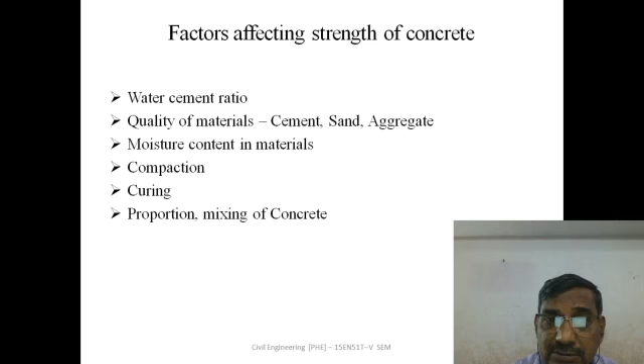Next, the proportion of the concrete, mixing procedure of the concrete and efficiency of the workmanship count for the strength of the concrete. The grade of concrete, mixing of concrete, design of concrete all affect the strength of the concrete.

Next, concept of design mix. It is the process of proportioning the various ingredients which produces concrete of specified properties in both fresh and hard state at a minimum cost with maximum strength.

Generally, we are using M15 grade, M20 grade concrete for all RCC works, that is beam, slab, columns, footings, etc. But for specific concrete works like bridges, dams, water retaining structures, these grades will not be workable. We go for higher grades of concrete, M30, M40, like that. So these are the special types of concrete which are designed in the laboratory with a number of experiments to get the maximum strength with minimum cost.

Following are some methods of mix design, that is ACI mix design practice, that is the American method, USSR mix design practice, that is the Russian method, British mix design practice, that is the England practice. Then in India we are using IS mix design practice as per IS code 10262 and IS 456 and SP 23. These are the guidelines which provide the design steps of mix design practices in India.

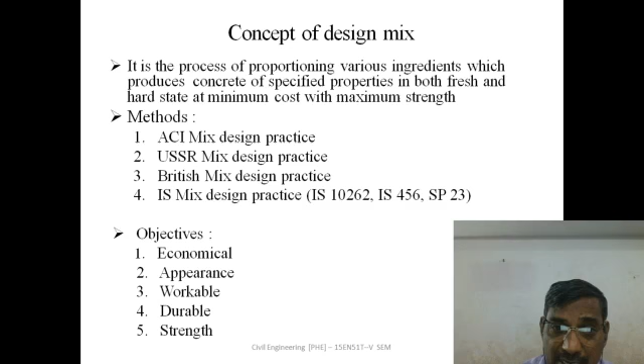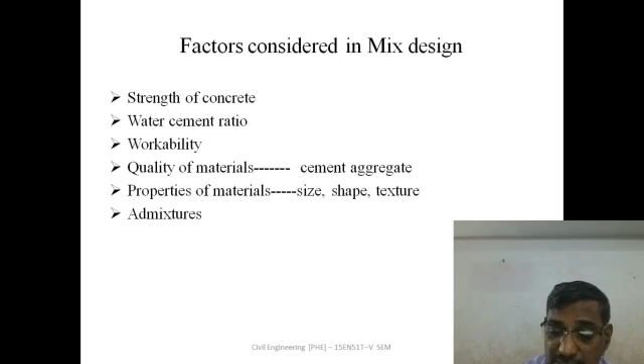Factors considered in mix design of concrete are strength of concrete, workability of concrete, durability of concrete, water cement ratio, quality of the materials like cement, aggregate, sand, water and some admixtures if added, then the properties of material, size, shape, texture and water content, and if admixtures are used, the properties of admixtures are also considered.

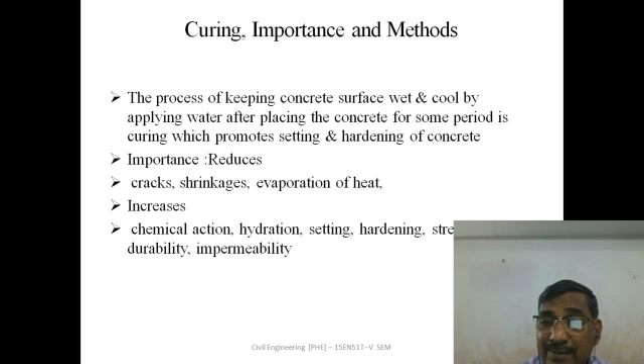Next is curing, importance of curing and some methods of curing for different works. The process of keeping the concrete surface wet and cool by applying water after placing the concrete for some period is called curing, which promotes setting and hardening of the concrete by reducing the effect of heat. It reduces the cracks, shrinkages, evaporation of heat and increases the chemical action, hydration, setting time, hardening time, strength, durability and impermeability of the concrete.

Different methods of curing are spraying and ponding. Water is sprayed on the concrete surface and water is stored on the concrete surface. Next, membrane curing, covering with sand, earth, sawdust, straw, cotton mats, gunny bags, etc. Using waterproof papers, chemicals, curing admixtures, cooling agents. In some specific concrete, application of heat is also made with the help of steam, infrared radiation, and electric curing.

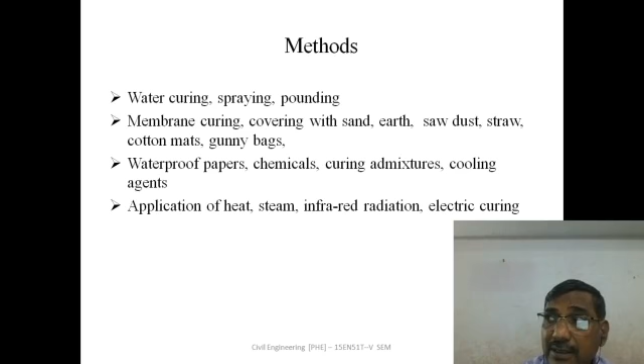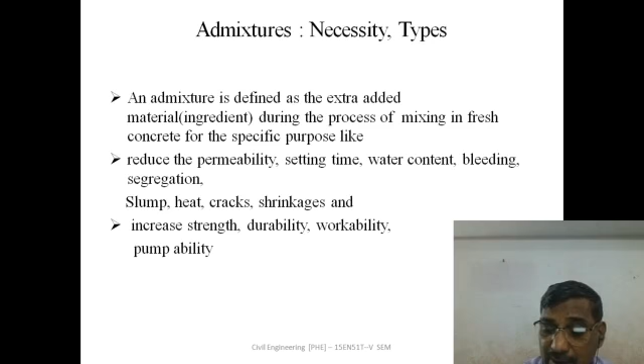Next, admixtures. These are the extra components added to the concrete other than cement, sand, aggregate, water. For a specific purpose, a specific material is used. They are called admixtures, which reduce the permeability, setting time, water content, bleeding, segregation, slump, liberation of heat, cracks, shrinkages, etc. And these admixtures increase the strength, durability, workability, pumpability of the concrete. For specific reasons, specific properties, a specific material is used.

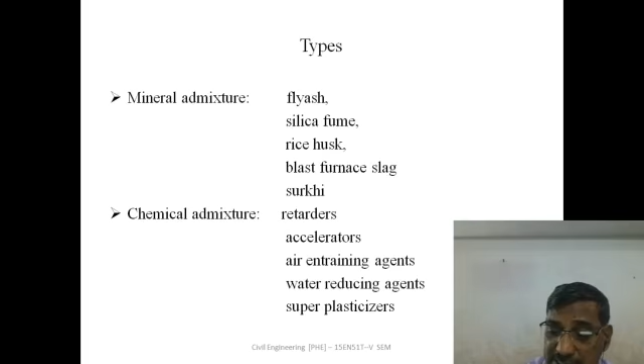Types of admixtures: generally they are classified as mineral admixtures and chemical admixtures. Mineral admixtures are generally available in the form of powder in nature like fly ash, silica fume, rice husk, blast furnace slag, surkhi, etc. Chemical admixtures are some compounds or chemicals generally in the form of liquids. They are retarders, accelerators, air entraining agents, water reducing agents, plasticizers, superplasticizers, etc. For specific reasons, specific admixtures are used.

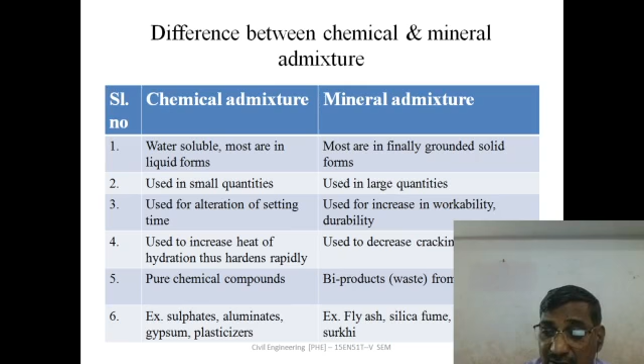Chemical admixtures are pure chemical compounds in the form of liquids, and mineral admixtures most of the time are byproducts or waste material from industries. So for example, sulfates, aluminates, gypsum, plasticizers are the best examples of chemical admixtures. For mineral admixtures, fly ash, rice husk, surkhi, silica fume are some of the examples. So this completes unit 1, that is chapter 1, introduction to concrete.